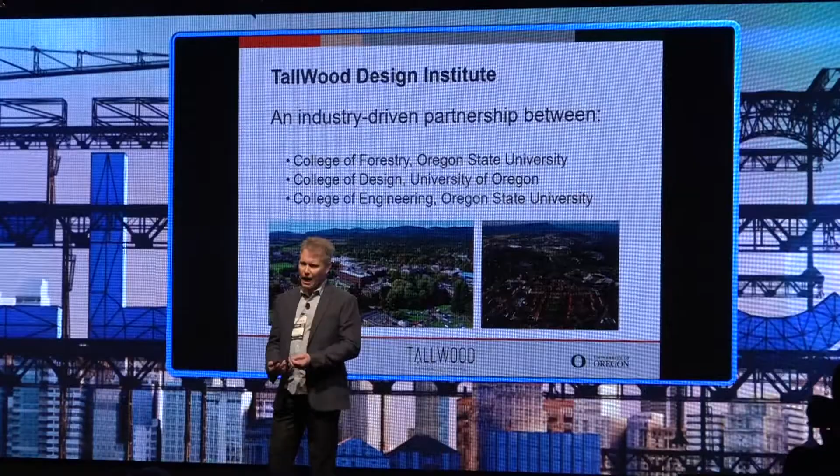The Tallwood Design Institute is a partnership between the College of Forestry at Oregon State University in the northwestern USA, the College of Design at the University of Oregon, and the College of Engineering. What we're trying to do is combine architecture, structural engineering, and wood technology and science together to research and develop new solutions with wood.

So we really have two purposes. The first is to grow the manufacturing base for structural wood products in Oregon and the western United States. Secondly, to eliminate and overcome some technical challenges and perhaps some public perception challenges around using wood in new ways, or perhaps returning to old ways with a more modern system.

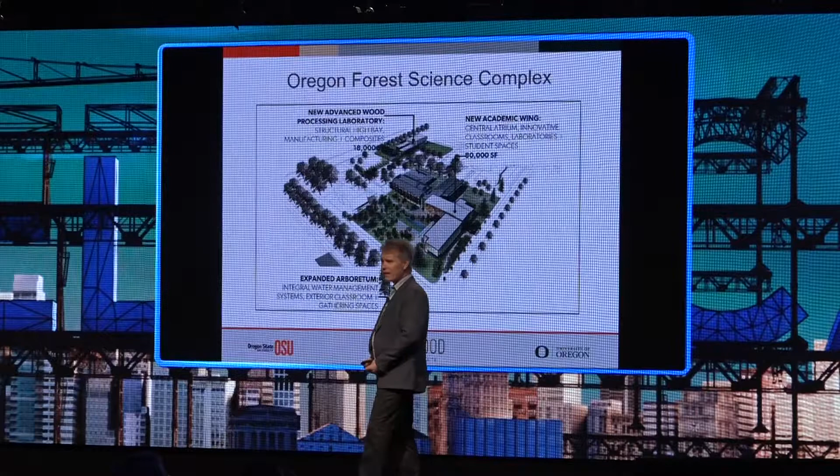We're investing heavily in this at Oregon State University. We are spending $70 million for 3 new buildings: a new College of Forestry building, a new structural laboratory, and some other buildings. So what is cross-laminated timber?

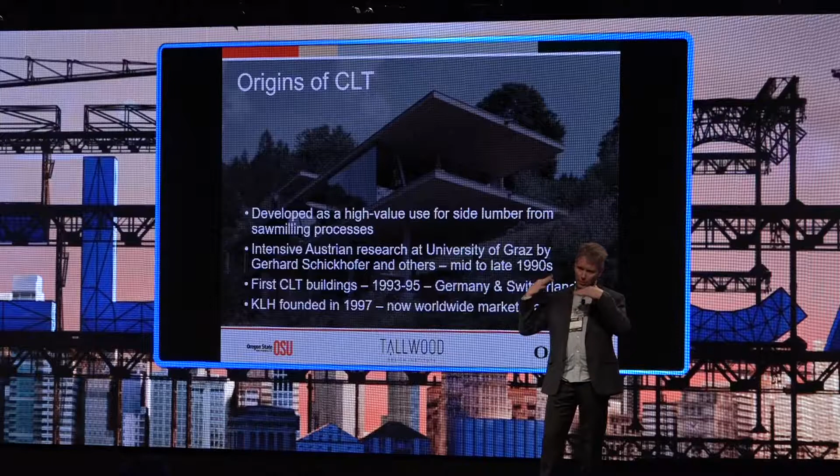This originated in Austria. The reason for this was to try to create new value for the lumber that was used in the sawmilling process. The lumber that comes off the side of the log is often a smaller dimension. It's not as useful, it's not as high value—sometimes it's viewed as waste. Researchers in Austria, prominently Gerhard Schickhofer and others, did a lot of research on this, testing the structural properties of CLT panels, and began to build buildings around 1993.

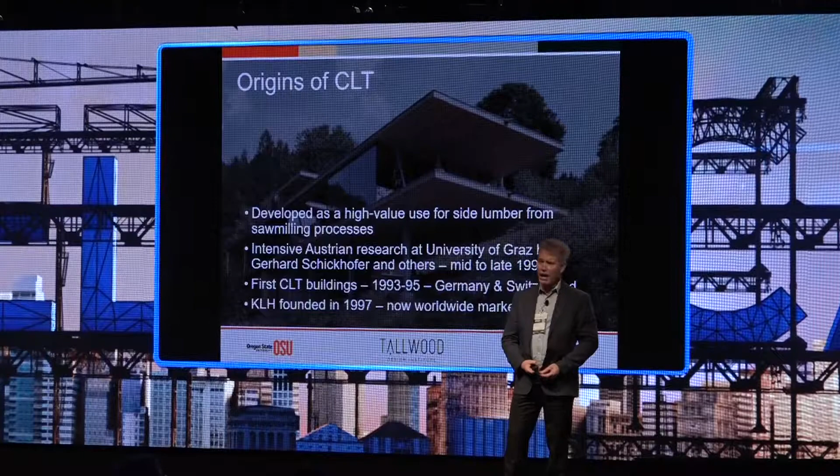Then the first cross-laminated timber manufacturer, KLH, was established in 1997, and it remains a market leader worldwide today.

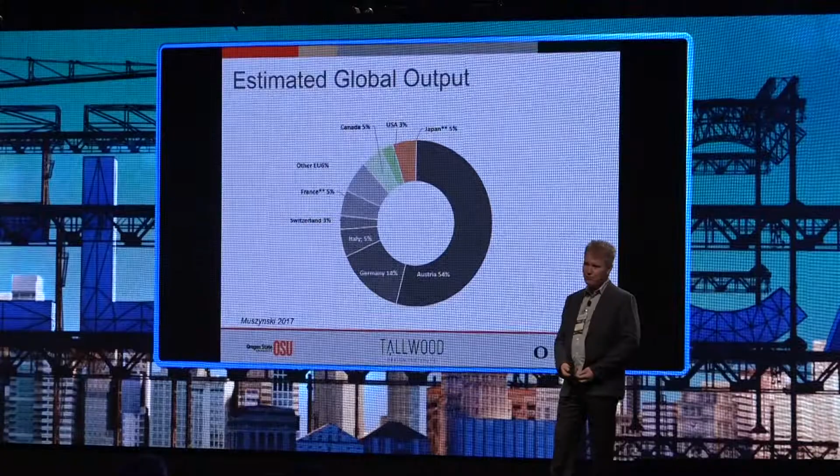Today, you can see that most of the production facilities are still located in the German-speaking regions of Europe—Austria, Germany, Switzerland—with some production now happening in Sweden, Finland, and Norway. In terms of global output, Austria is responsible for more than half of global production. Germany is next, then Italy, and then some new players are coming in: Canada, Japan, and the US is just getting started, but I think we're going to see rapid acceleration there.

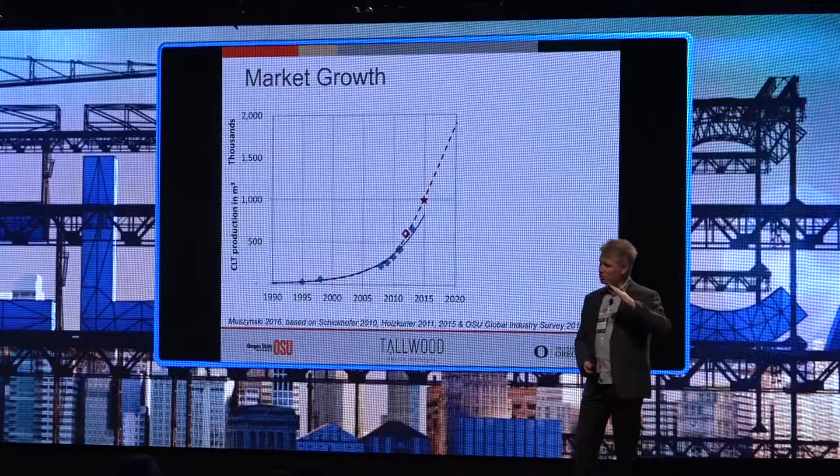This is by one of my colleagues who's surveyed CLT manufacturers and looked at the expected growth in the market. As you can see, in 2015, when he was doing this research, we were already on a very steep upward trajectory.

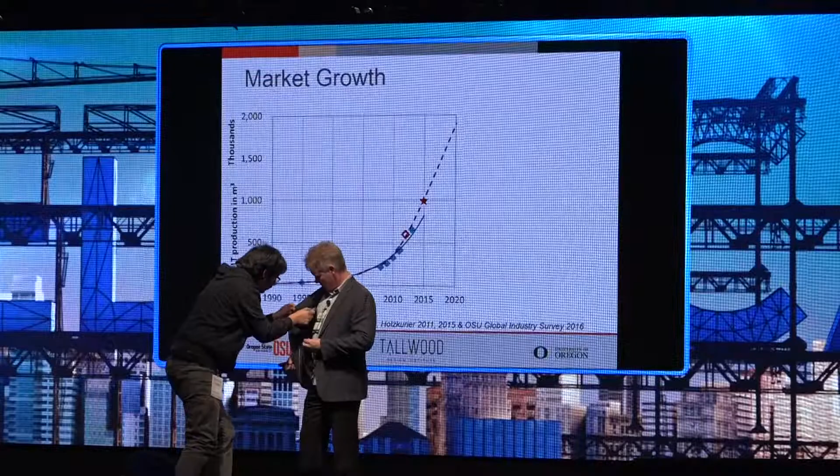Testing, testing. My batteries are running out. Sorry, it's late in the day.

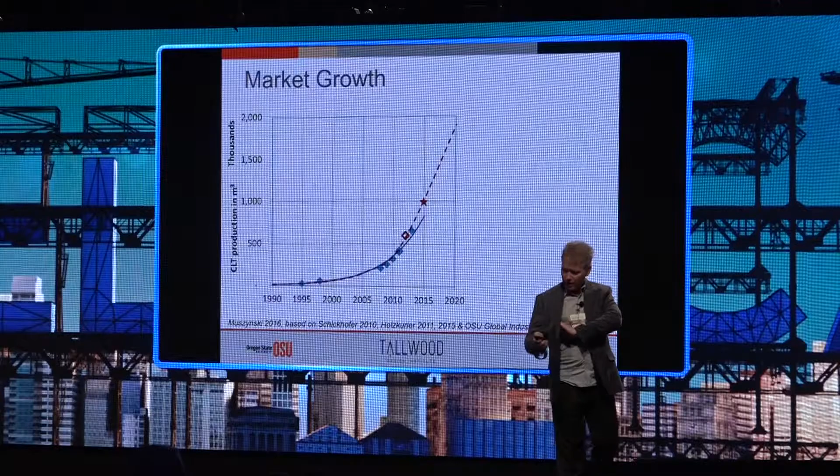You can see the market growth is expected to be quite rapid. My colleague also asked manufacturers whether they were expecting to increase their output in the next 12 months, and about 1/3 of them said that they were.

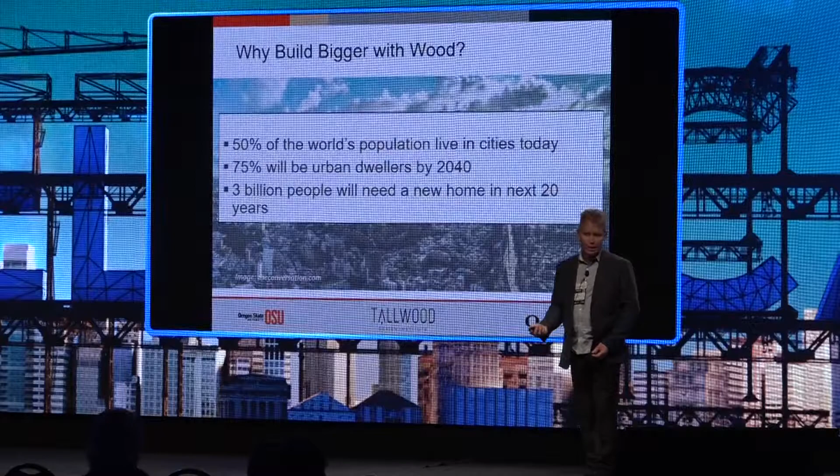So why do we want to build bigger with wood? Well, 50% of the world today lives in cities. In about 20 years, three-quarters of the world's population will live in cities. So we have rapid urbanization, and it's estimated by the UN that 3 billion people will need a new home in the next 20 years.

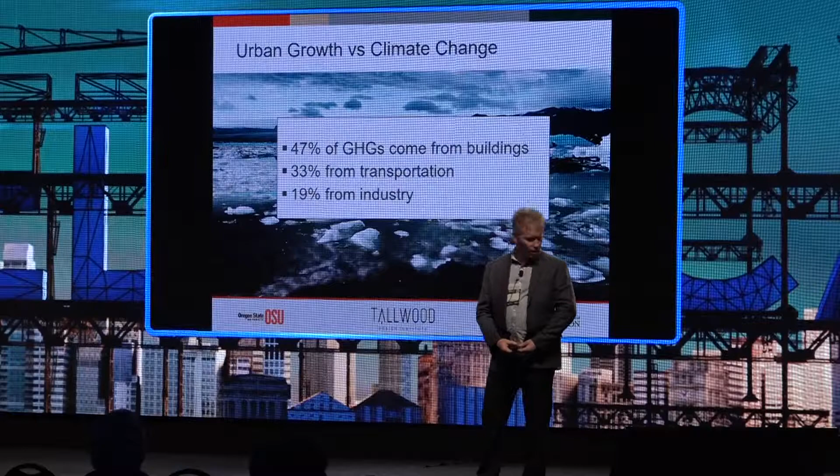That is butting heads with the problem of climate change. When we think of climate change and emissions from greenhouse gases, we usually think of cars and industry, but it's a fact that almost half of greenhouse gas emissions actually come from buildings in some way.

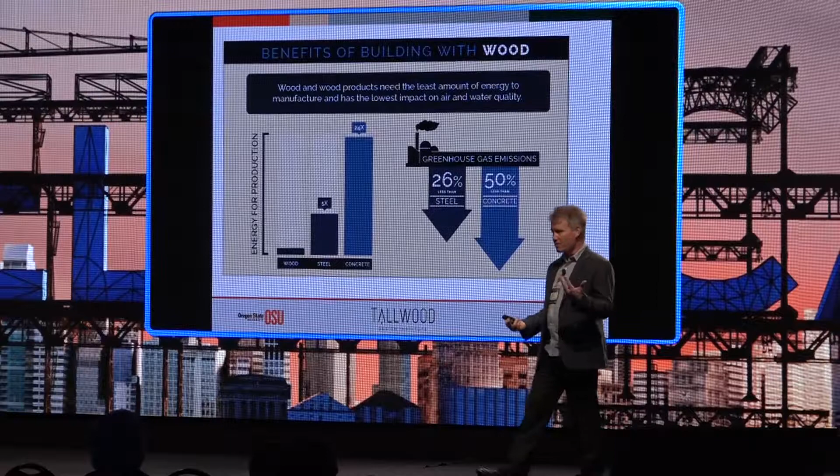And how does that break down? It's in two ways: the embodied energy used to create the materials to build with, and then the operational energy used to heat and light the buildings during their lifetime.

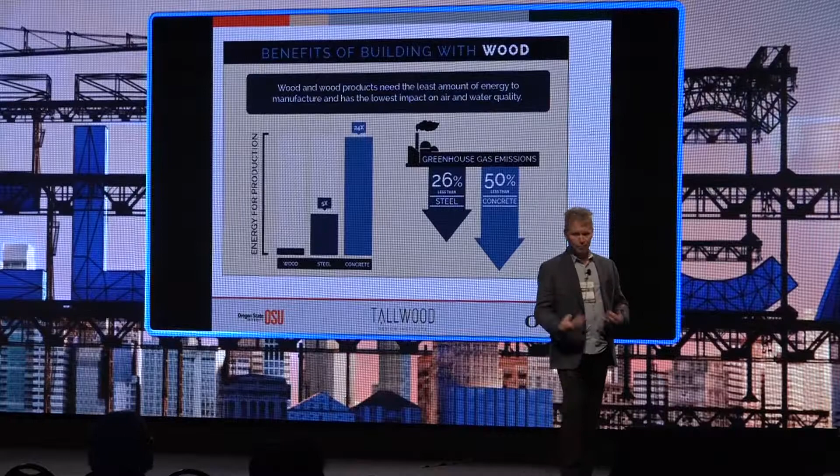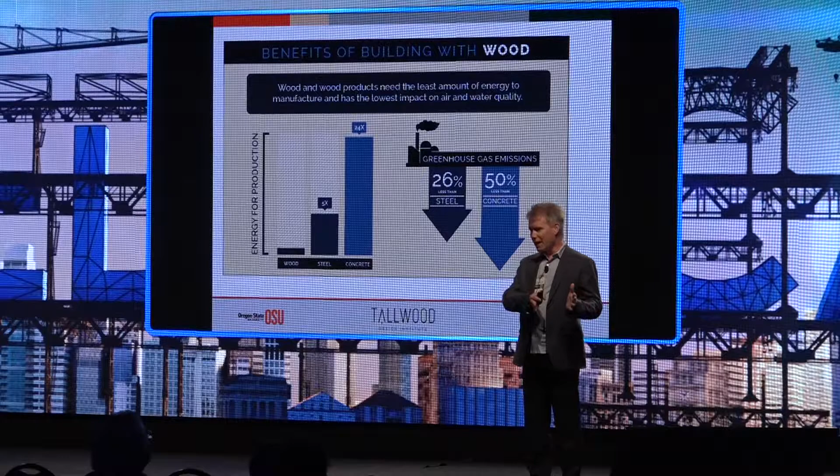Today, 30% of the greenhouse gases from buildings comes from the embodied energy, the energy used to make the materials for the building. Because our lighting is getting more efficient, our homes are getting more energy efficient, our windows are getting better, in about the next 10 years that's going to be more like half and half. So half of the greenhouse gas emissions from buildings are going to come from embodied energy.

When we look at these charts on the left, you see the energy required to produce wood versus steel and concrete, so you can see some very good environmental arguments for using more wood in buildings. Looking at greenhouse gas emissions, wood produces 26% less than steel, and 50% less than concrete.

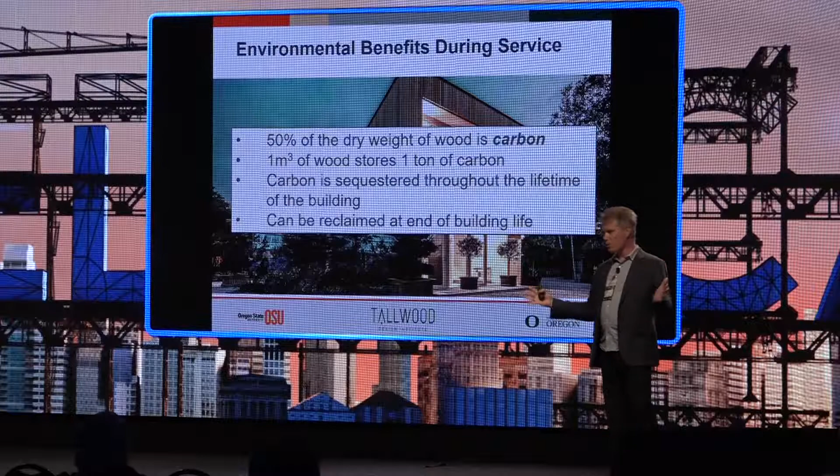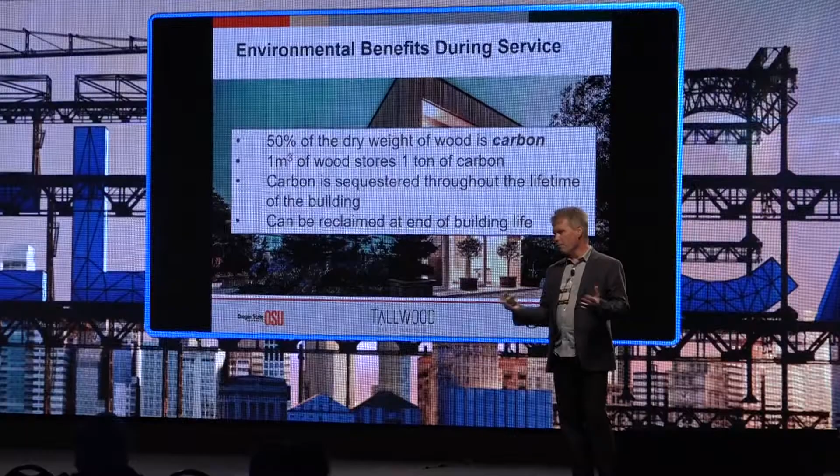Additionally, 50% of the weight of wood is carbon, and a cubic meter of wood stores about 1 ton of carbon. So that stores rather than emits carbon during the life of the building, and at the end of it you can often reclaim much of the wood products and use them in their next life cycle.

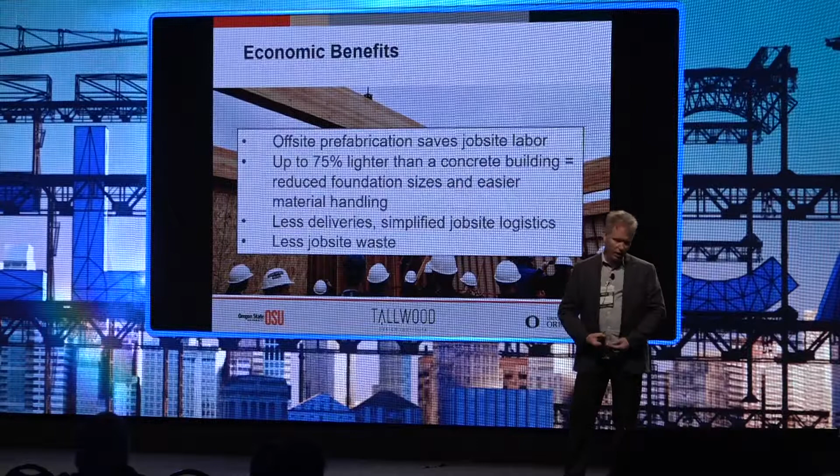Economically, there are some attractive benefits too. Usually, when you build with wood, if you're building a big or a tall building, the cost of the materials is a little bit more than if you're doing a reinforced concrete or steel building. But then you save incredibly on labor costs, because these things can be made in prefabricated sections that go together very quickly on the job site.

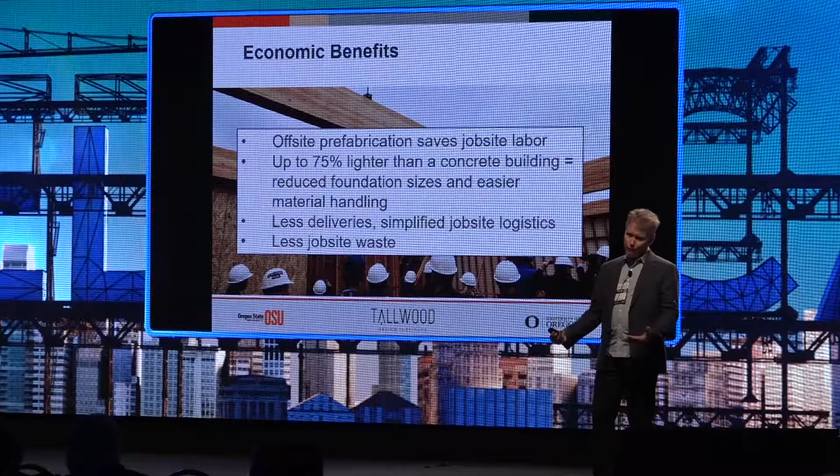You also have a lighter building, so the foundations can be less costly. You can build in areas with soft soils, putting tall buildings where they otherwise would not be possible. And then there are other advantages: you need fewer trucks to bring materials to the job site, there's less waste, it's quieter, and it's a more attractive workplace.

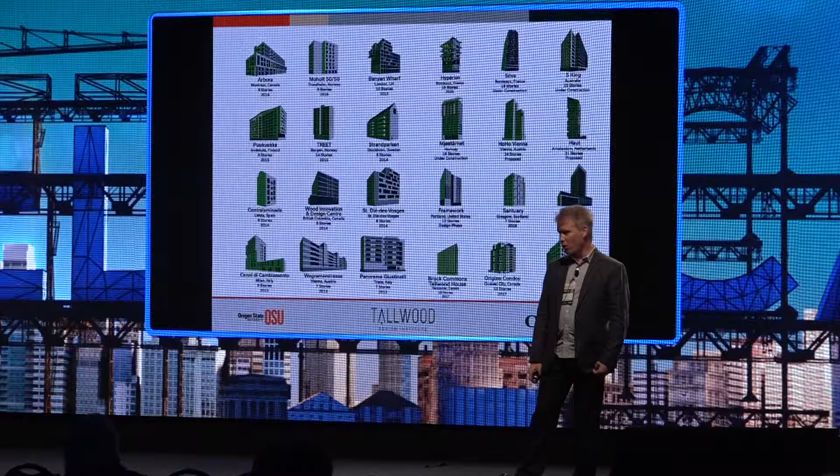Right now, the tallest wood building in the world is in Vancouver, BC, Canada. It's 18 stories tall. There's a 24-story building under construction right now in Vienna, and you can see many more examples in this slide.

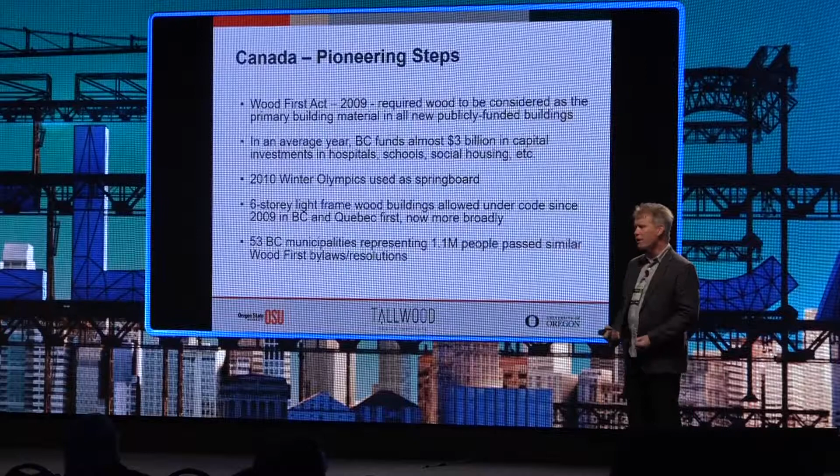In North America, Canada got into this area a little bit ahead of everybody else, particularly British Columbia on the west coast. The reason for that was the provincial leader of BC brought in a new law that said if you want to build a building that's going to be paid for with public money in this province, you must propose a wood solution. You can also propose a concrete or steel solution, but you must develop a wood solution, or have a good reason why not. That really started things off.

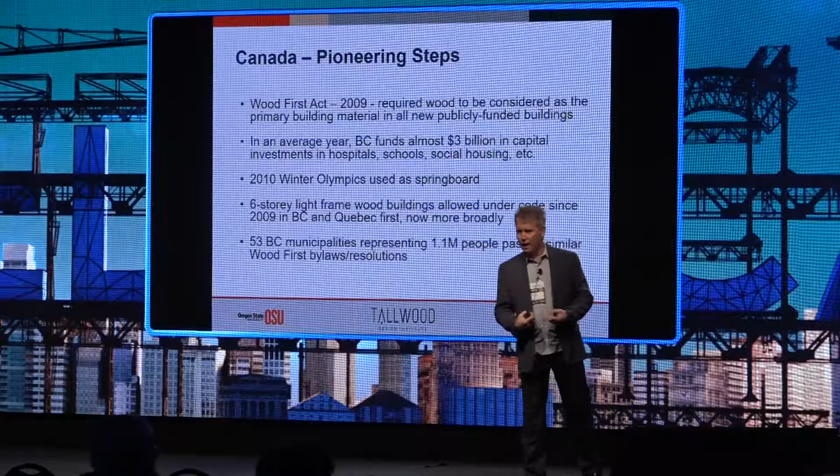Not every building automatically became built in wood, but many did. An important driver was that the following year, in 2010, the Winter Olympics were held in Vancouver, giving an opportunity to showcase wood on the world stage. What was interesting after that was about 53 cities and towns around the province of British Columbia, representing over 1 million people, brought in their own bylaws saying that if they were going to build a library or a school paid for by the city, they should have a wood solution.

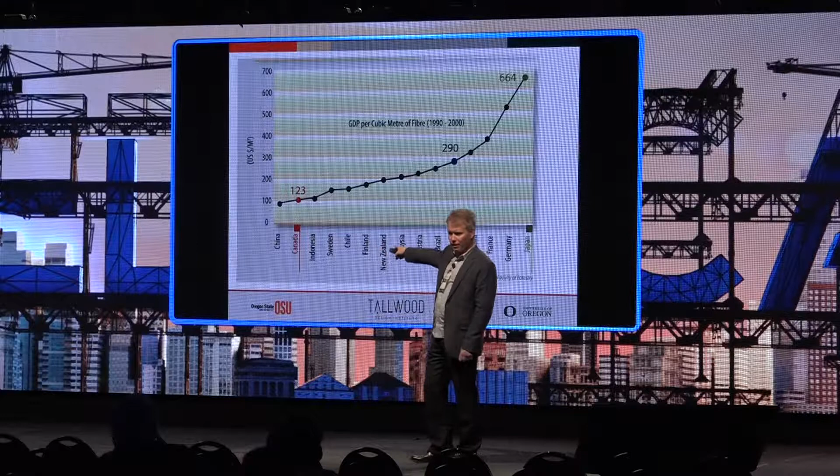Another reason for Canada's interest in this whole area of building using more wood was the value adding. Canada wanted to add more value for every tree that was taken out of the forest. This is a graph showing how much dollar value was generated for every cubic meter of wood. And you can see Canada at the left-hand side. These figures are about 15 years old, but you can see in those days, Canada was just above China.

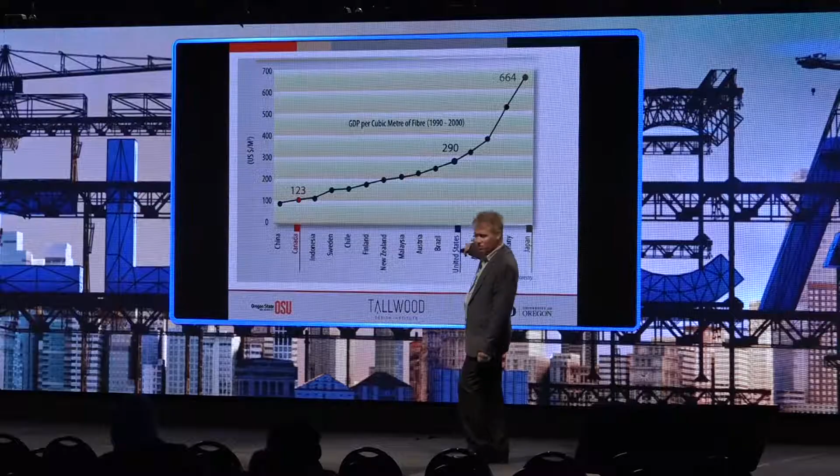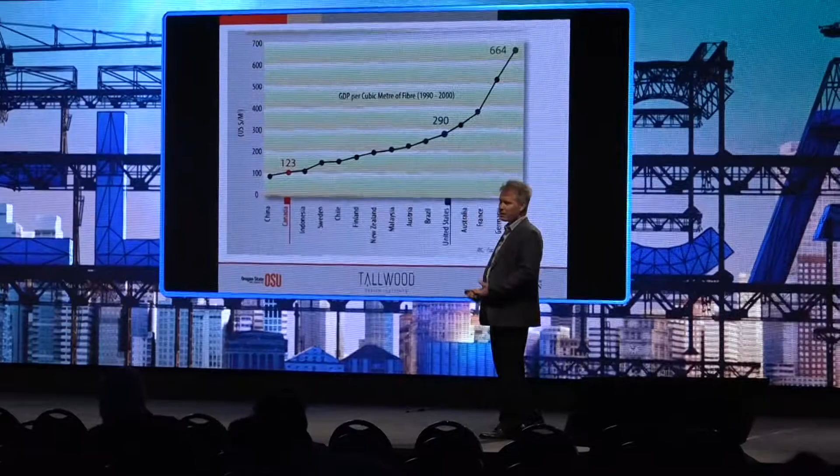The US was substantially ahead, $290 per cubic meter. And then we have Germany and Japan way up here, generating almost 6 times as much as Canada. So the idea was, don't just ship logs, don't just ship lumber, let's do more, create jobs, keep the social and the economic benefit in the country.

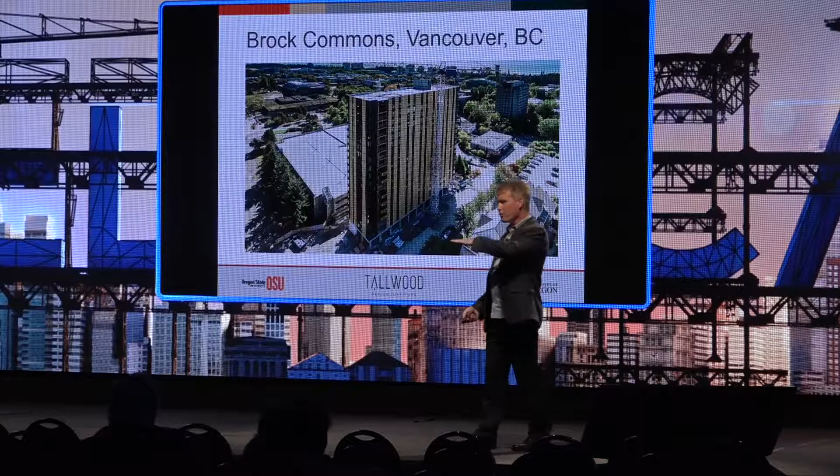And it surprised the general contractor with how quickly the wood went up. The crews that were installing the wood elements actually had to slow down because the people that were coming behind to do the concrete work, the electrical, the plumbing, could not keep up. So there's a short video here that is quite a nice illustration. Might just have to go here and start it off. And you can see that 2 floors were built every week. So it took 9 weeks for the wood structure.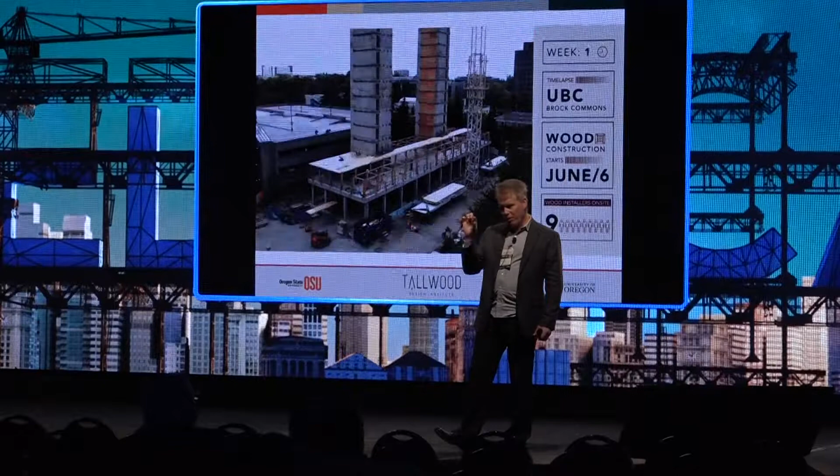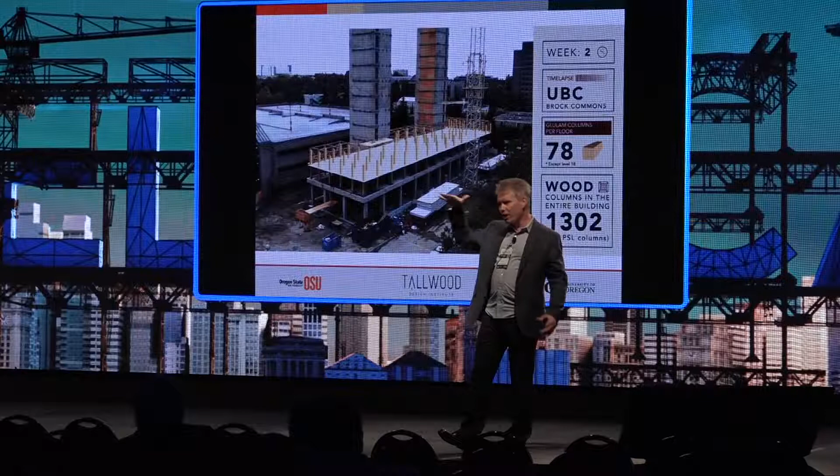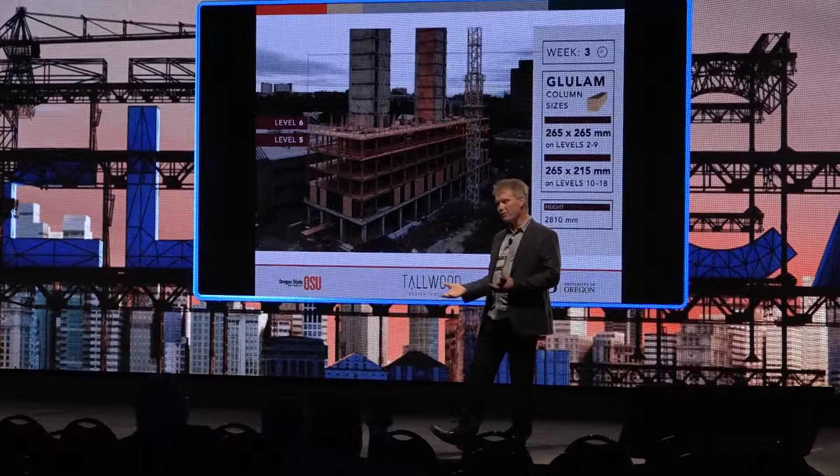If you walk inside the building today, it doesn't look like a wood building. The wood decks are covered up with a thin layer of concrete, which helps to stop vibration, helps to keep it firm, helps to stop transfer of sound through the floors. And the wood on the walls and ceiling is covered up with gypsum board for fire protection. So it doesn't feel like a wood building, but we're storing a lot of carbon, and the greenhouse gas emissions from the materials used are much, much less than if we used all concrete and steel.

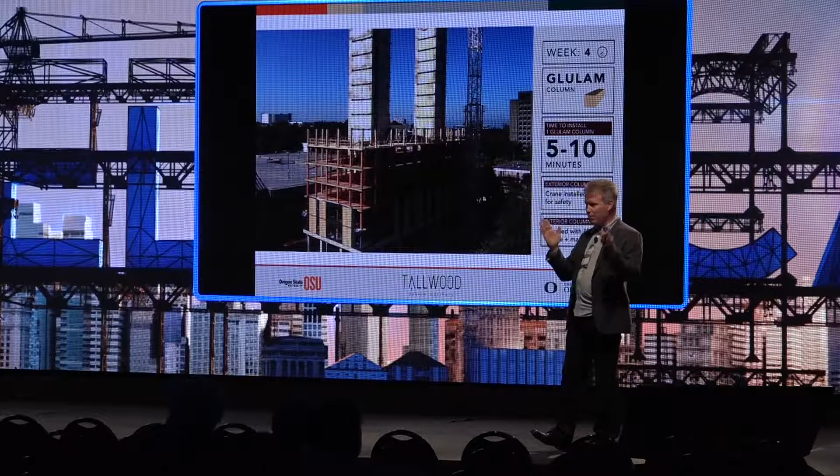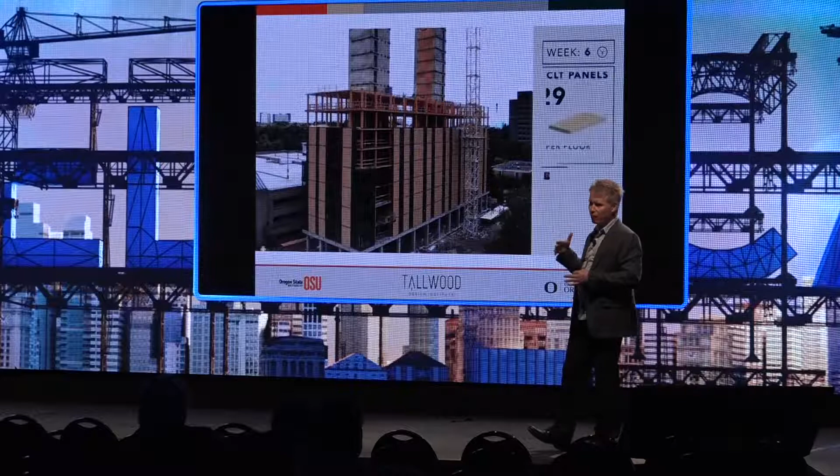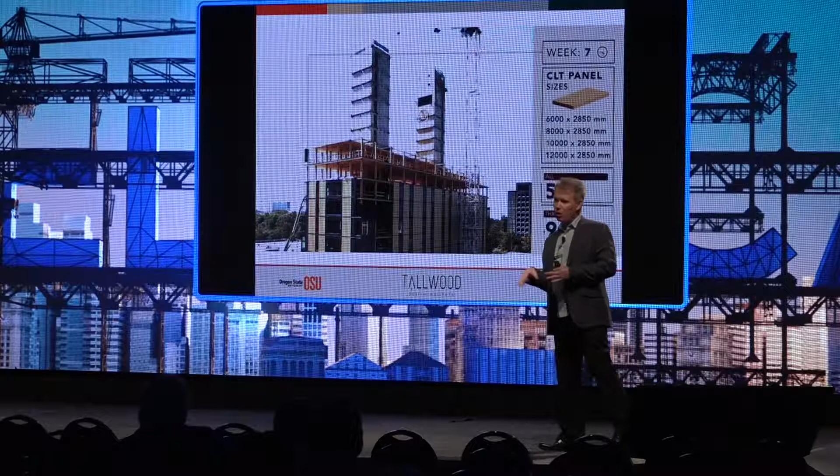You can see that the elevator shafts are concrete, and they provide the lateral resistance in this case for this building. It is possible to do this with mass timber, but so far it hasn't been tried on this scale of building before. The university wanted to move students in; they didn't want any delays. They had a shortage of housing on the campus, and so they really needed to get people in on time. So they were a little conservative when they designed the building, so there wouldn't be any delays in getting building permits.

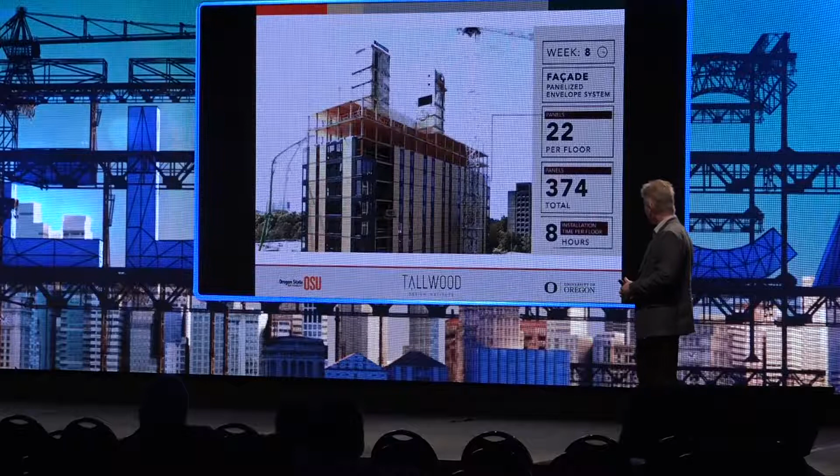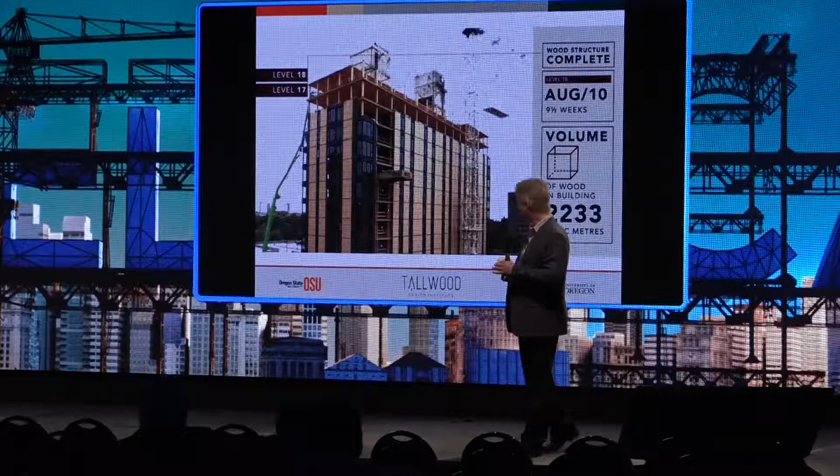So there was a crew of 9 people working on the cross-laminated timber decks and the beams, the columns, I should say. And as I say, they were installing 2 floors every week. So 1 every 2.5 days.

So let's switch and talk about the United States and what's been happening recently. I'm living right now in Oregon, and Oregon has become the hub within the United States for mass timber. There's a few reasons for that. There's strong support from the state government at all levels, all of the agencies working with the state government. And that's very, very important.

Oregon, my colleagues say, is the best place in the world for growing trees. The climate, Douglas fir grows abundantly. It rains a lot in the winter. We have warm summers. It's a perfect climate, and for that reason it's become the leading lumber producer in the United States and the leading plywood producer in the United States. However, because of various things, some conservation changes about 20 years ago, the amount of timber being harvested on federal government-owned lands has gone down. And so that's meant loss of jobs in the rural communities.

And the governor sees mass timber as a way to maybe bring back some of those lost jobs into those rural communities, and actually bring back much higher value jobs than existed before in those communities.

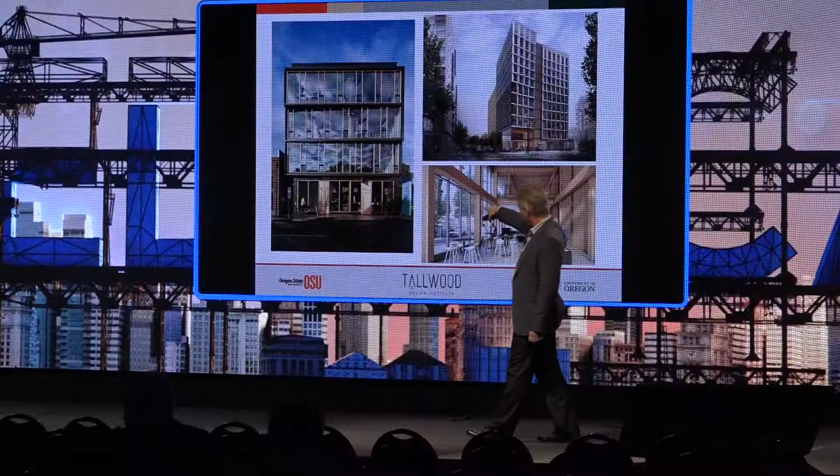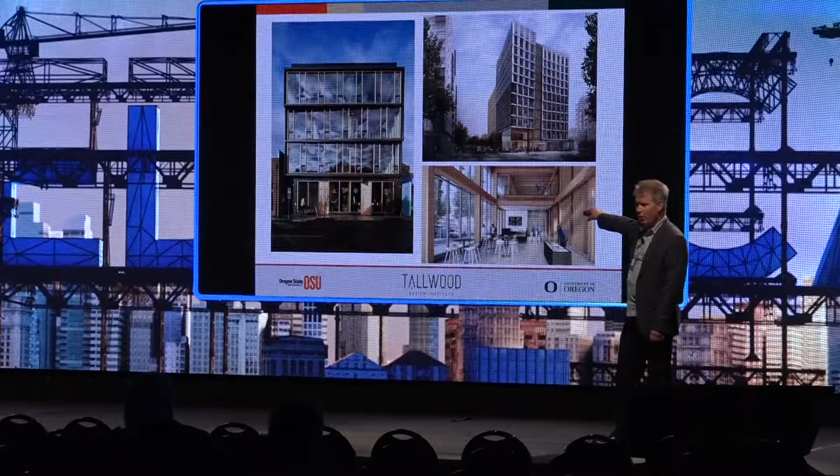Here are some buildings in Portland, Oregon, that are currently built in mass timber. This is an architectural firm, Albina Yard. This one is just going up next year, so it already has a building permit and will be a 12-story building containing retail on the bottom, office space, and then social housing on the top floors. This one is Carbon 12. This one is nearing completion.

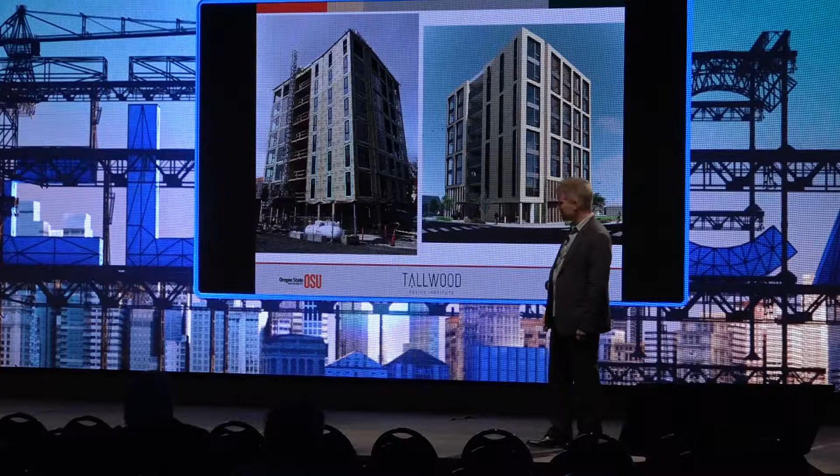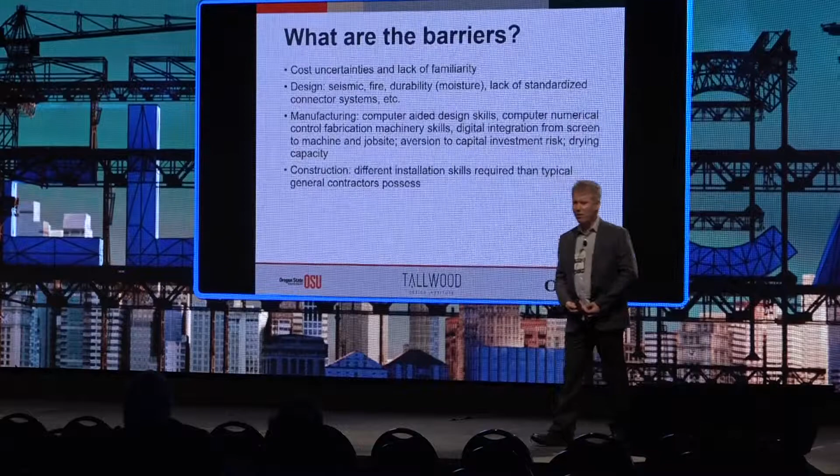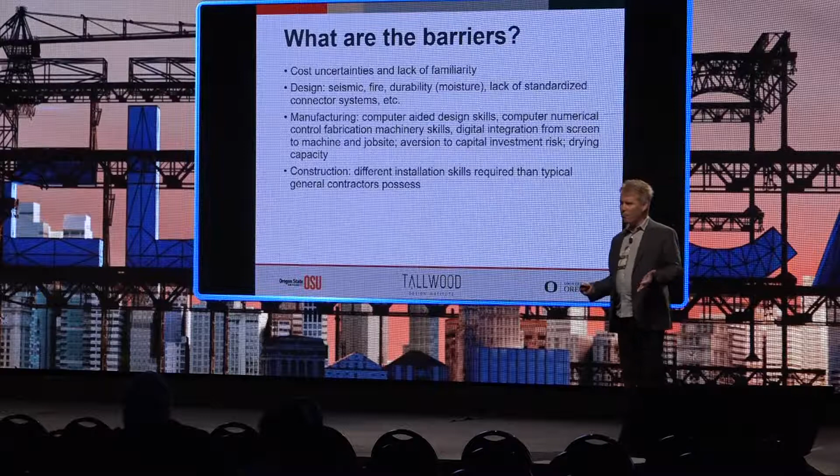So that's all very well. We talked about some advantages of using wood. What are the challenges? What are the barriers to using wood? Well, you can probably think straight away of things like earthquakes, fire, what happens when it rains and the wood gets wet. This way of building is quite new. There's no standardized ways of connecting the panels together. You know, that's a problem because when you have customized solutions every time, it puts the cost up.

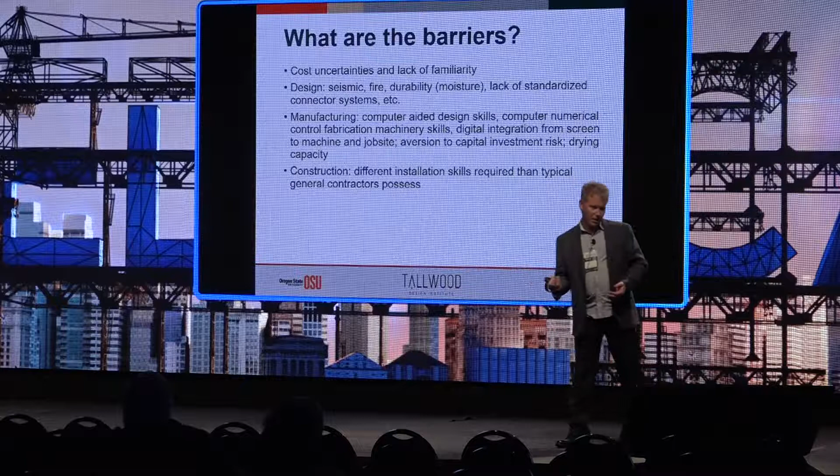You also have building contractors who are not familiar with this way of building. And so what happens when you estimate the cost of a building that you're not familiar with creating, you put the cost up, right? You add a little bit, an extra 10, 20% in case you lose money. So these buildings are still maybe artificially expensive. And as building contractors and architects and engineers learn how to do it and learn how to overcome the technical challenges, we're seeing the costs go down.

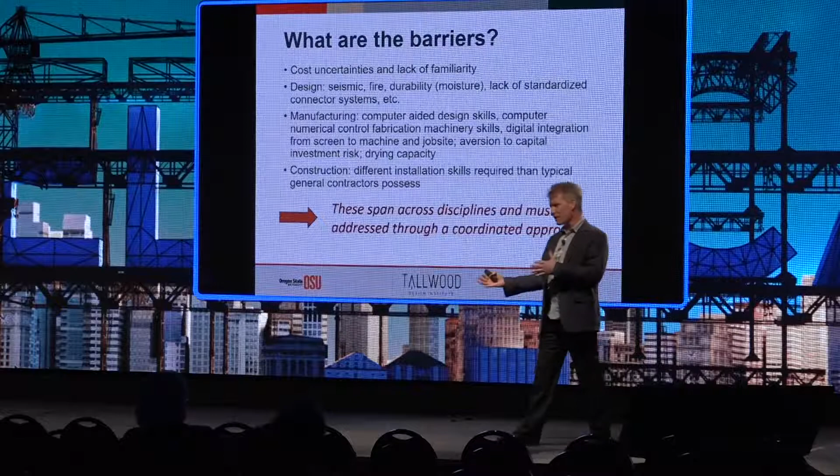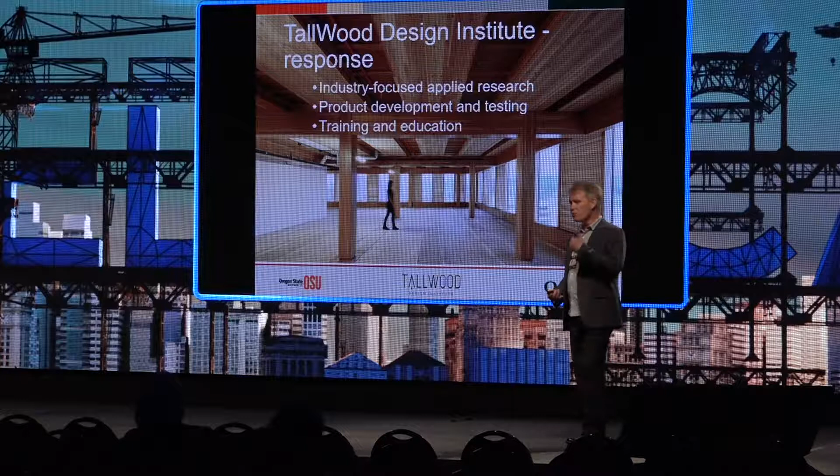And so our institute is involved in training programs and different ways of getting research information out into the community. And we need to work across the disciplines, not just among architects, not just among engineers or builders, but across the whole spectrum to tackle these problems and these questions. So the three things we do: research, product development and testing, and training and education, as I mentioned.

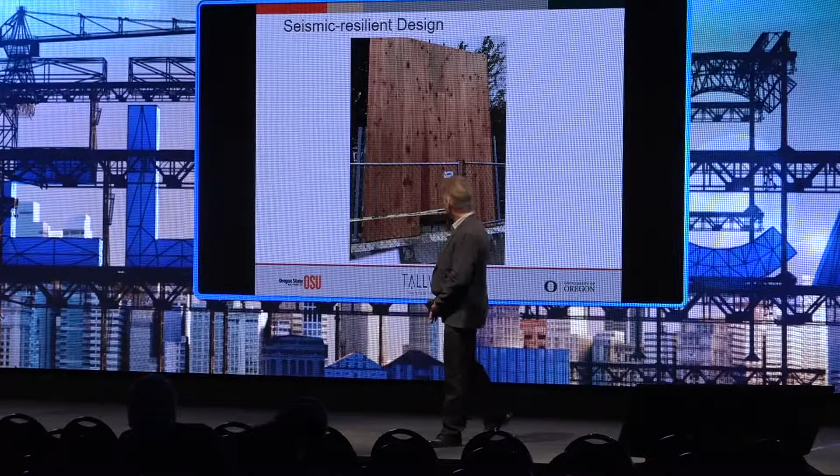I'm not going to go through this long list, but we have a lot of research currently underway sponsored by our institute. And I should mention, we're maybe one of the biggest institutes in the United States doing this kind of work. But there is research going on at universities all across the country. This one is interesting and I think worth mentioning here because you're living in the area with the most seismic activity in the world, I believe. On the west coast of the United States, we also have the same issues with seismic activity.

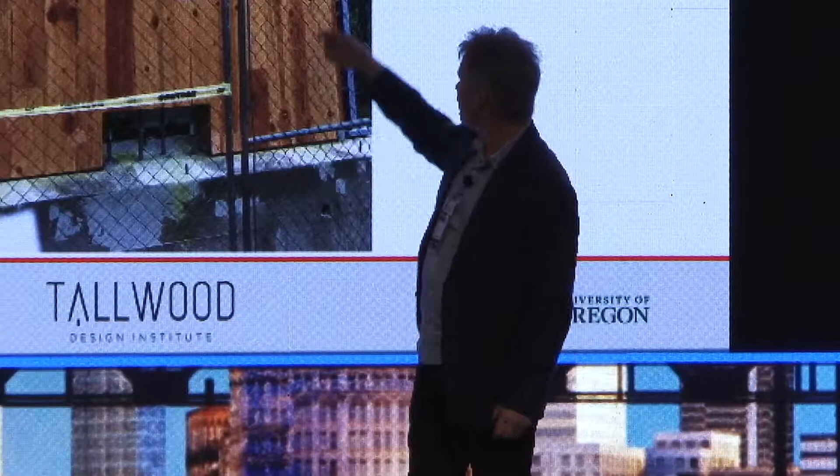And this is a system designed in New Zealand called the Rocking Wall System, where the panel is fastened with cables that run up and down through the panel and into the concrete foundation. And then in the event of an earthquake, the panel will actually rock like this, but the cables pull it back into the center when it's finished. There's some inexpensive metal connectors connecting the panels together. When the earthquake comes, these will kind of pull apart. They'll elongate, so after the earthquake, they'll need to be replaced. But the point being, it's easier to replace these small metal parts than the whole building.

It was designed in Christchurch when, after the terrible earthquake there, they had very little loss of life, fortunately, but over 1,200 buildings had to be demolished. So the city was almost bankrupt, and it led the researchers there at the University of Canterbury to develop this new system. We're also doing some testing of our own, and I think you're going to see a short video of a shake table test at University of California that we sponsored recently.

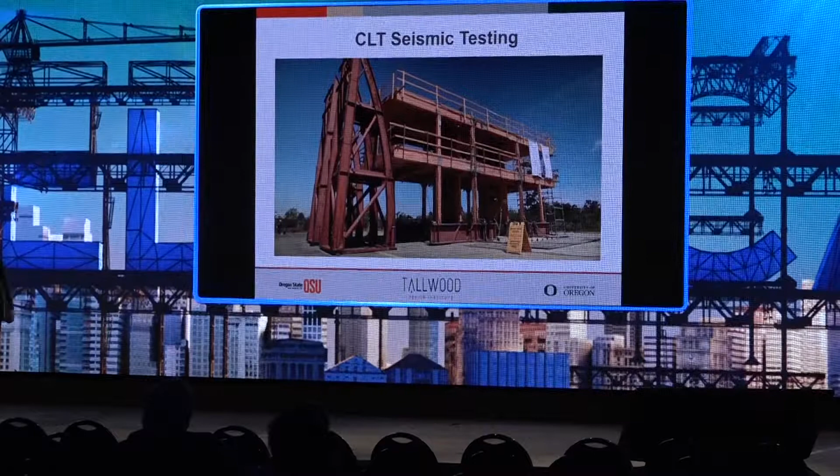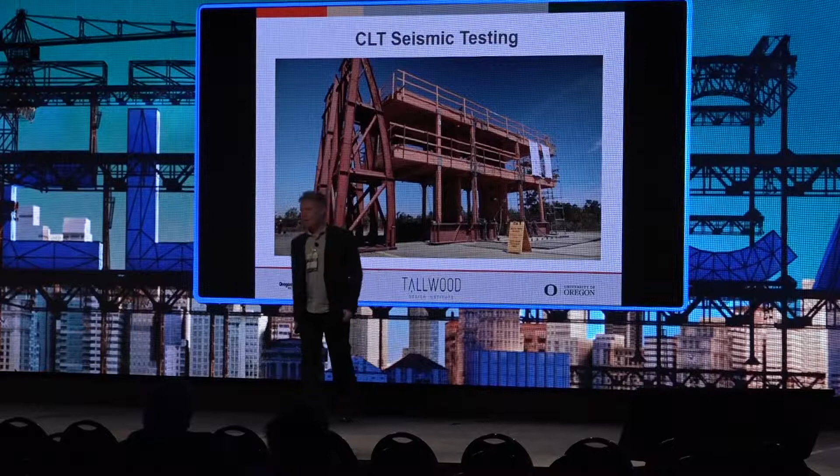This is a 2-story cross-laminated timber building with various connectors that we're testing, including the rocking wall system I just showed you. That's here. And this just happened in July, so the results are still being analyzed, but we had some very favorable data. We simulated 10 earthquakes on this, and actually it held up really, really well.

The researchers were not expecting to be able to walk up on the building afterwards, but it was safe to do so. Another thing we're working on is, this video is going to play, hopefully, is fire testing. So fire is a huge thing.

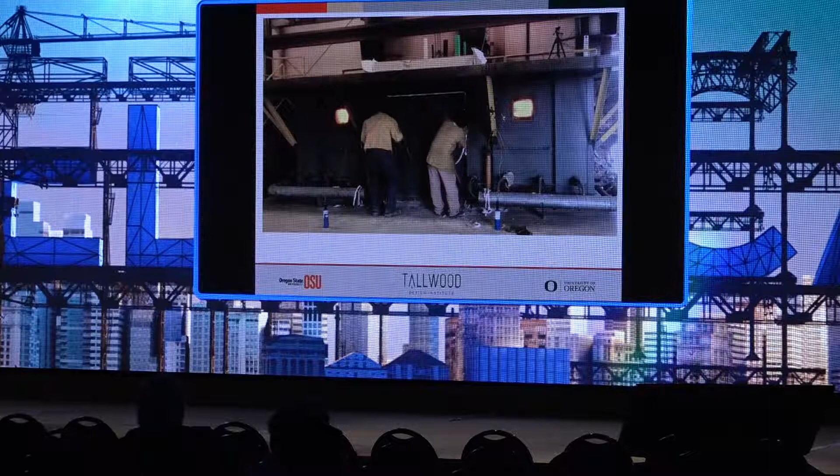Because the cross-laminated timber and these kind of products are very, very thick, what happens in a fire is the underside exposed to the flames will char. It'll develop char, just like you'll see on a log in a campfire. The char layer will then protect the interior part of the wood.

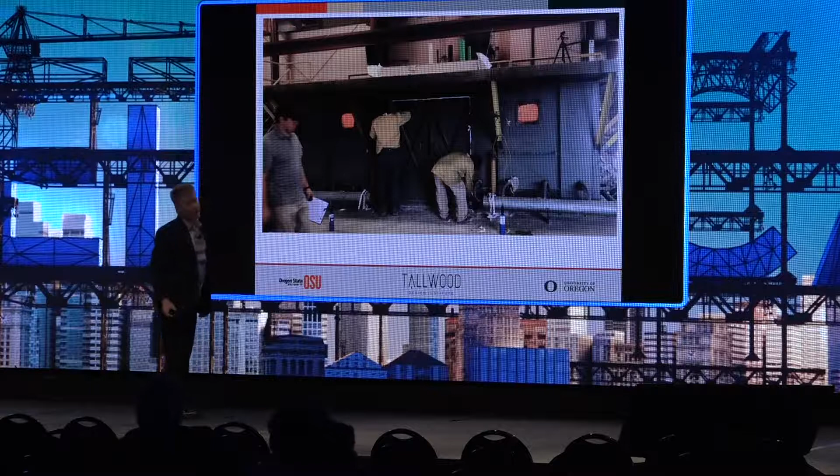So in this test, we had, in this furnace, 1,000 degrees Celsius on the underneath. So the panel that we were testing was up above there, you can just see. So 1,000 degrees Celsius underneath. And then on top, it was barely 28 degrees Celsius. You could put your hand on it during the test. We did a 2-hour test.

So this is the kind of thing you don't really believe unless you see it. And I recently saw this and took this very kind of poor quality video. I apologize. This is the kind of thing that allows the timber to be used in ways that were not possible before.

So the US Department of Defense is interested in this technology for their military bases. So they're testing it to see whether this could be resilient to a terrorist threat. The results were very good, and consequently, they built this 4-story hotel on one of their army bases in Alabama.

And they're seeing this, because of the prefabrication possibilities and also the blast resilient properties of these materials, as becoming an option for rapid deployment housing, not just for military use, but also, for example, after disasters. Like we've seen too many disasters recently in the Caribbean and the southern US. But these are the kinds of systems that could be deployed quite quickly.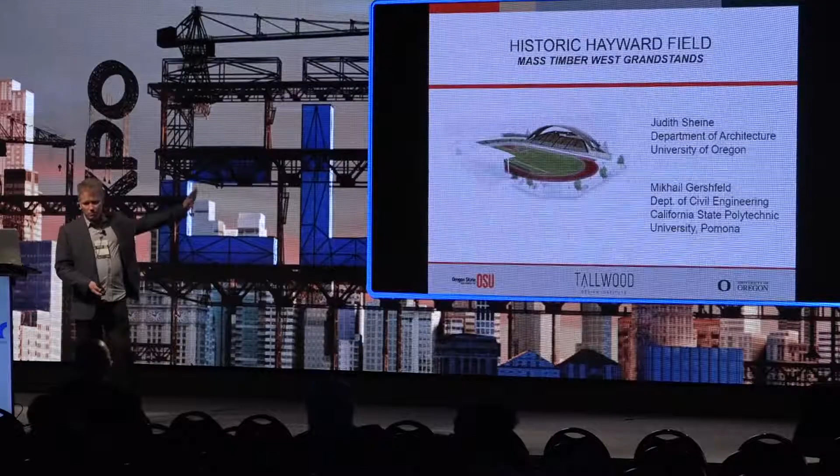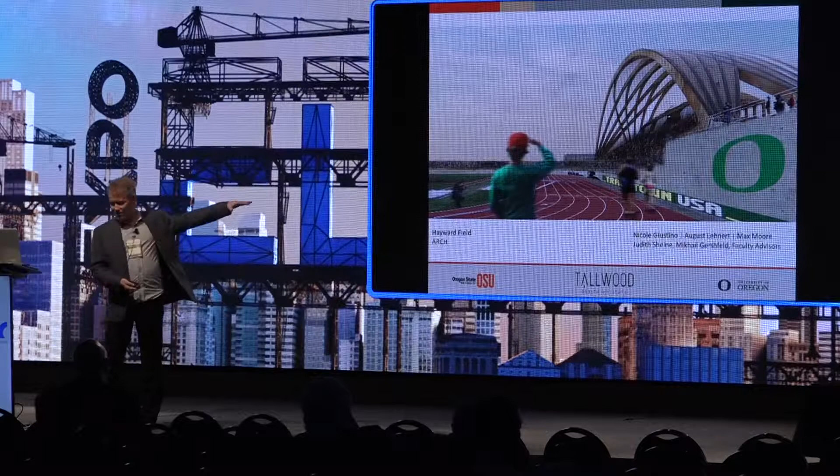Another one is this stadium project, which is happening. Eugene, the city of Eugene, is home to Nike. So Nike is spending a lot of money sponsoring events. The US Olympic team trains there. And this is another student project to develop grandstands using mass timber. Some really nice solutions there. And what we hear is the University of Oregon, where this is, are really thinking hard about perhaps building this from wood now. Originally, their plan was to build from steel and concrete.

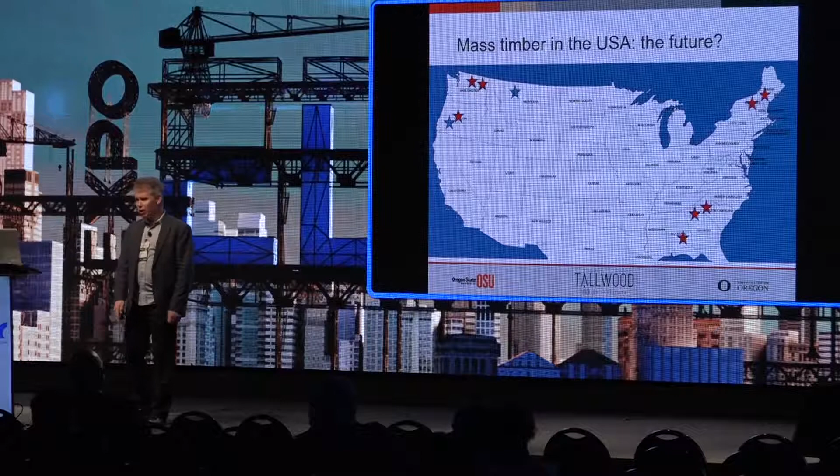What's in the future for this whole area? Well, I mentioned Freres Lumber, that's the company you just saw, planning to open some more plants. So currently, if you look on the map, the blue stars show you where the mass timber manufacturing facilities are, one in Oregon, one in Montana. Announcements have been made such that in the next 2 years, we can expect to see perhaps 10 plants, possibly more. This is just based on what we've heard so far.

In Oregon, there are some other producers that are thinking about jumping into this whole field. So when you saw that 3% of production globally was the United States, back at the beginning of my presentation, that could really be changing 2 years from now and as we go forward. So we're really excited about this area.